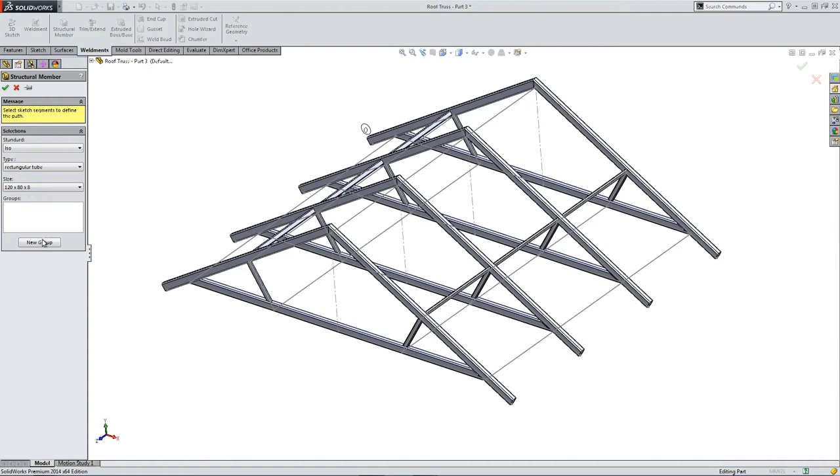Okay, so let's now put the structural support along the top of the trusses. We're going to use the larger rectangular tube in the structural member, and we're going to click the 3 cross support sections.

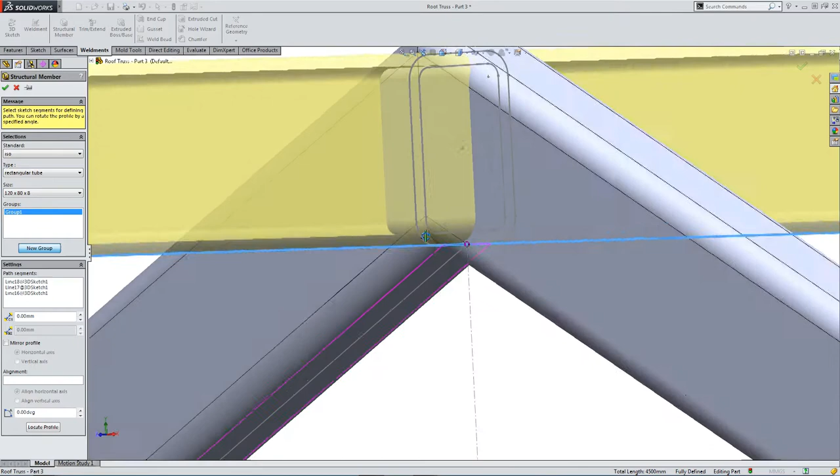Go to locate, profile, click the base, and the profile's still a little bit low, so let's go into the sketch again. It's not precisely where we want it.

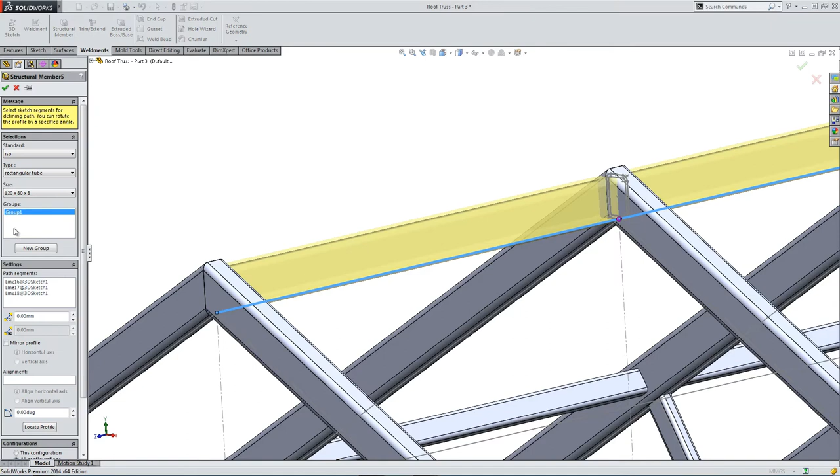So into structural member, just find the profile, yes, find the template sketch, there it is. Let's offset the vertex.

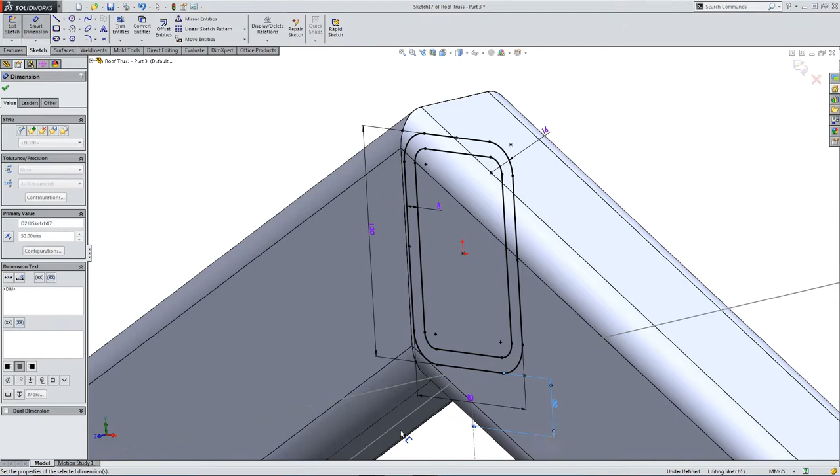Let's make it 30 mil. And it's auto offset, so it's brought it up and away from that base because we didn't want it to fall through.

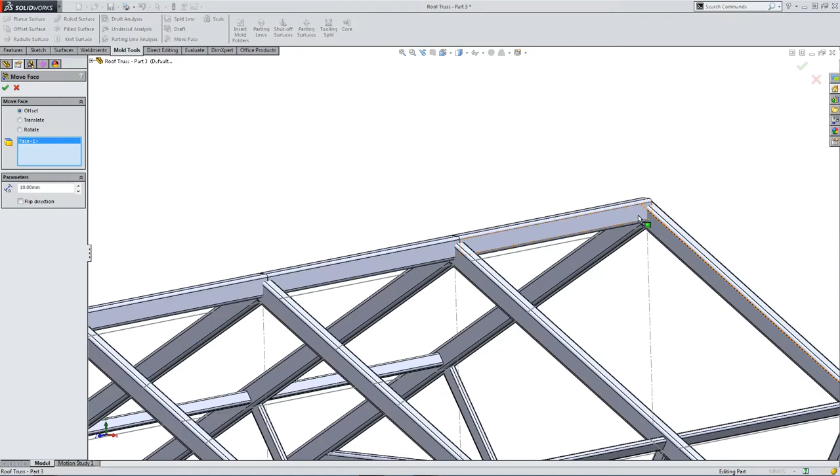So mold tools, move face. I just want to extend this end section, so I'm using the move face option. And I want to select both sides, but you can't do that because it's not gonna put it exactly where I want.

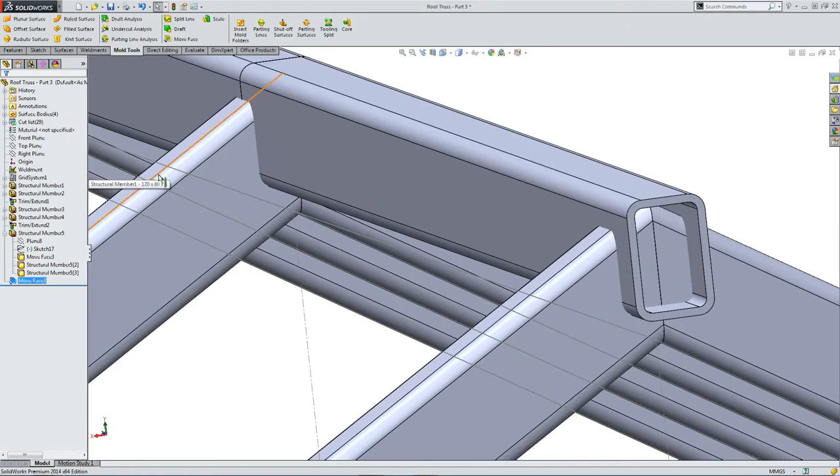No, because it's 2 different sections. So let's come out of that. Let's try that again. Let's do each section individually. So 10 mil. I just wanted to extend past the edge.

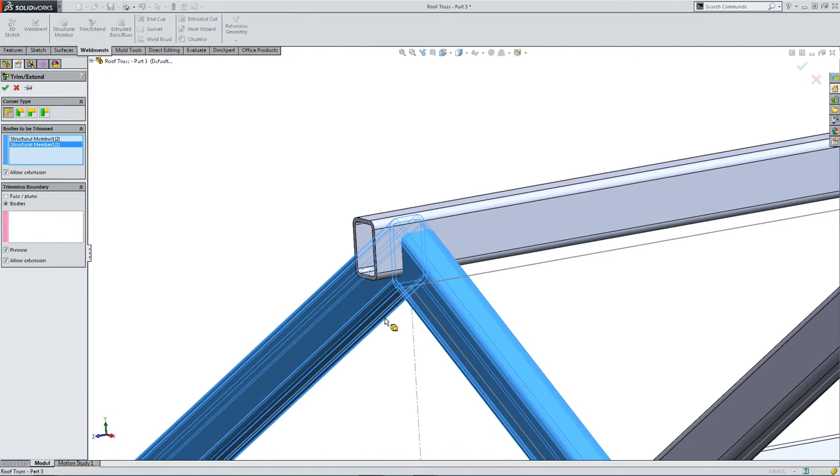And now I'm going to trim back around. So I need to get rid of the excessive tubing or box section. So trim, extend. We've selected the bodies we want to get rid of.

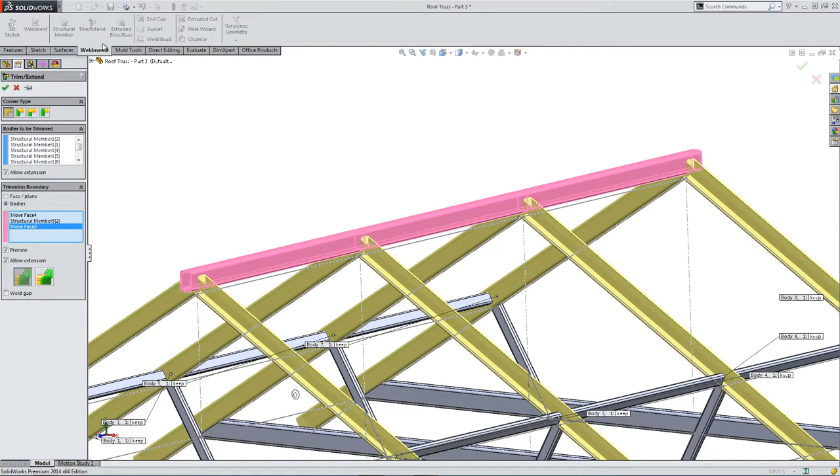Selected the body in pink that we want to use to trim. Need to select the additional trim bodies. Okay, let's accept.

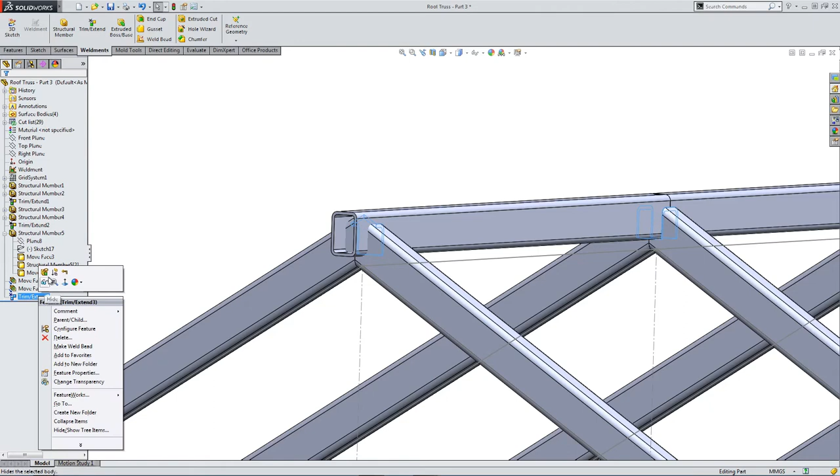Get rid of allow extension just because allowing an extension can actually bring things up and add geometry that you don't want. So it's trimmed everything except the part that we wanted here.

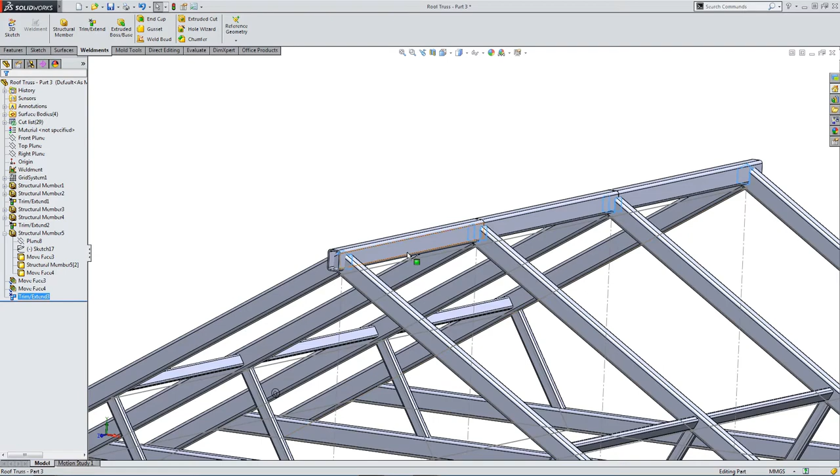So let's get rid of the final extension allowance. So it's trimmed these inner sections slightly differently from the end one.

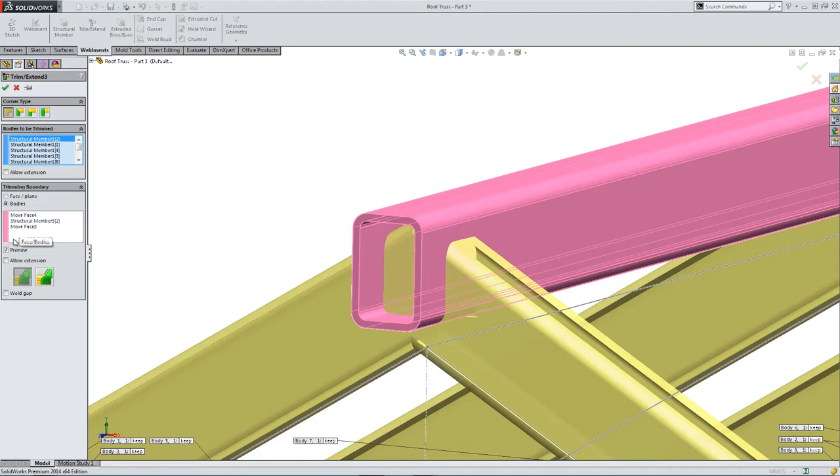Let's go back in, see where it went wrong. And turn off the allow extension feature for the trim bodies. And that looks exactly how we wanted it to look.

So now we've got our top support. And I think we can put a little gusset section underneath just to shore it up properly. So let's make it 500 mil by 500 mil.

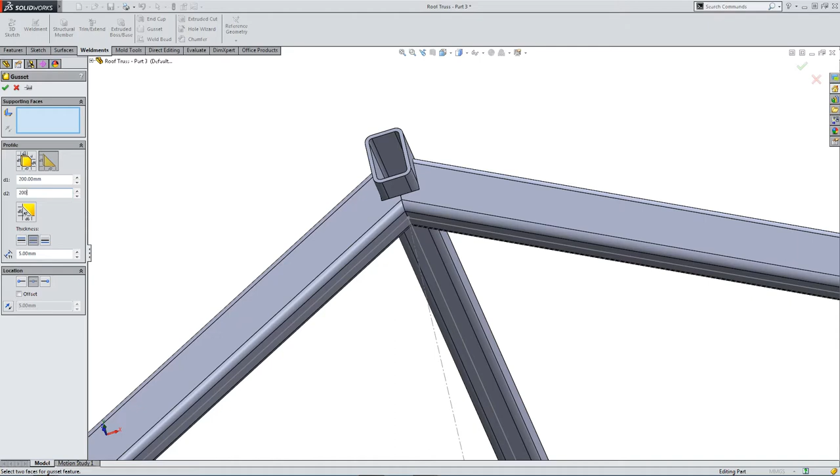Maybe 200. Okay, so our supporting faces, selecting them. We've got it aligned central, but we could move it over either way, like so, and we could offset it to the edge of the sketch if we wanted to, but we're going to have it right in the middle.

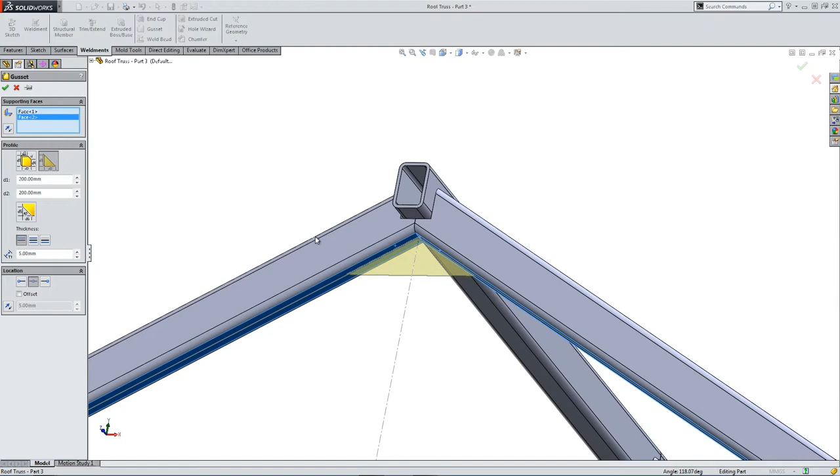So this would be a welded gusset going in just to add a little bit extra support.

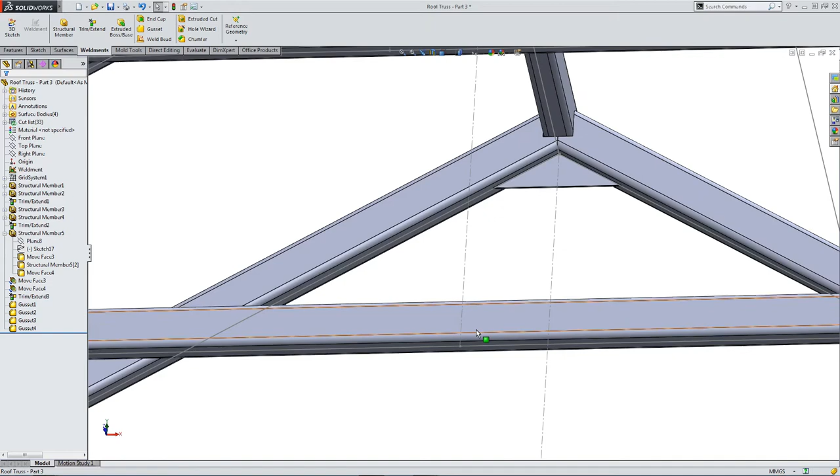Okay, so now we're finished with our gussets, and now we'll come to the reason why so many of these profiles were offset from the lines right at the beginning.

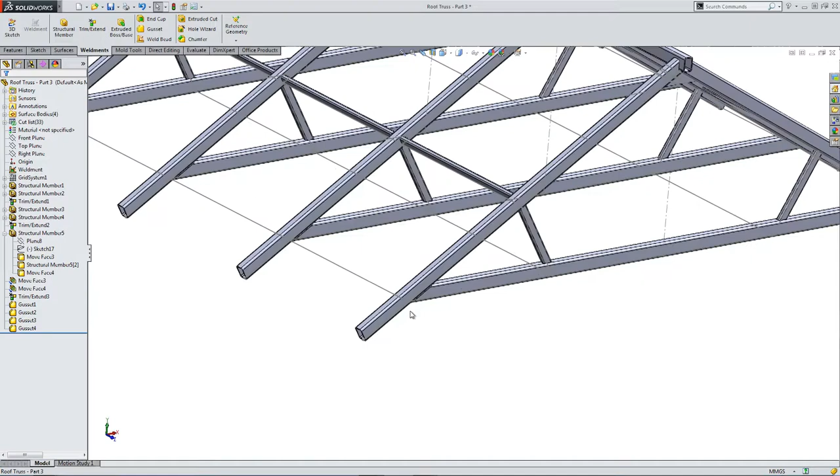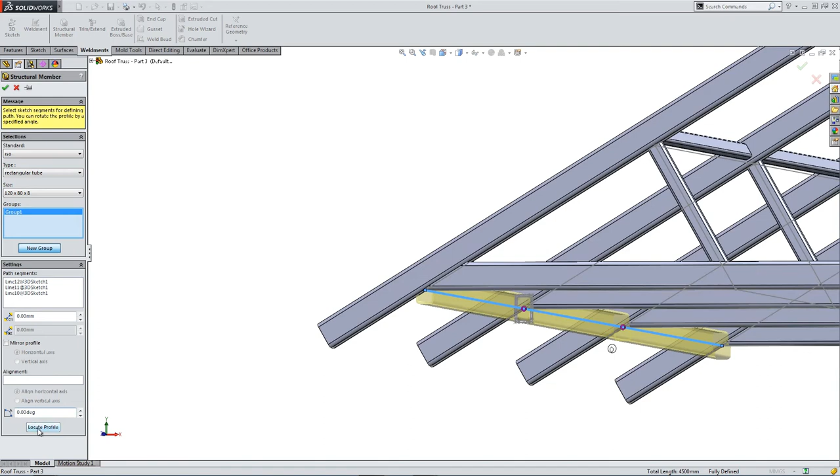So we go down to the bottom, so we're going to have our cross support that this whole truss section is going to sit on. So we draw a section that our truss will be laid upon.

And we snap to the vertex in the corner. So the corner vertex sticks this part right underneath our previously drawn horizontal section.

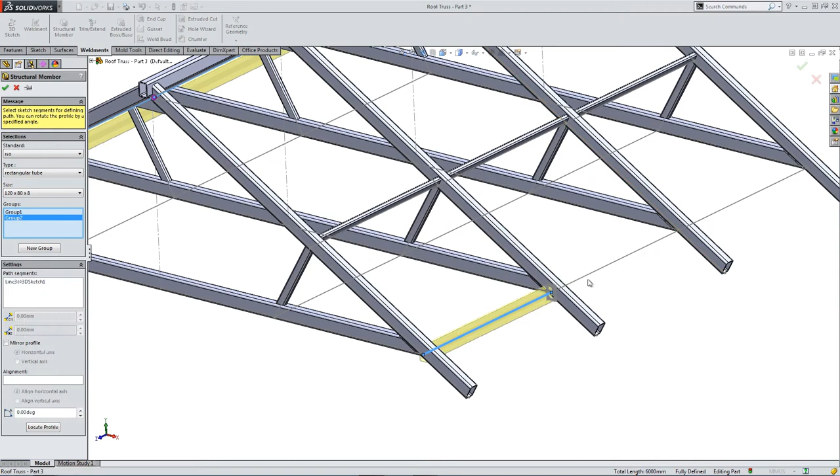So we've used offsetting to our advantage. So click the vertex right in the corner, brings it all down and away. Select that. So you can see.

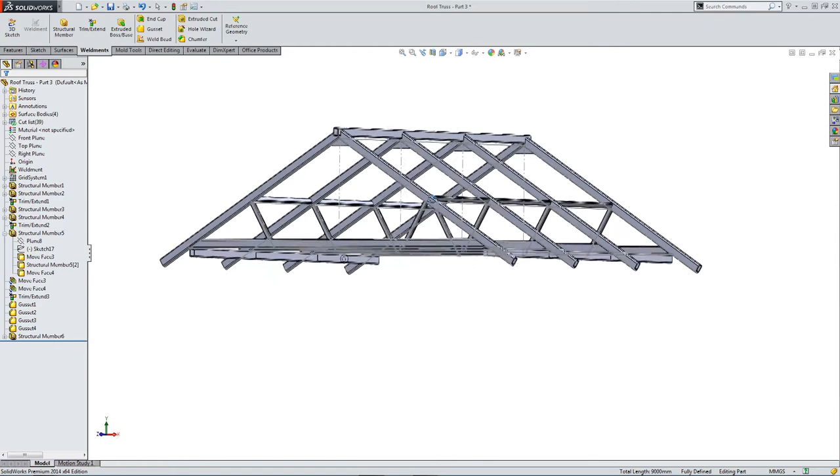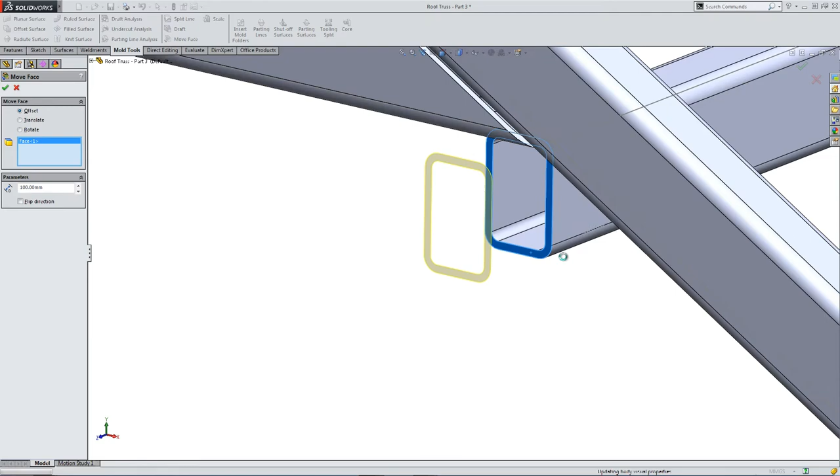Just need to go to mold tools, and let's move those end faces. So this looks a little bit more respectable.

Let's finish up by adding the weld beads. So let's go to weld bead in the weldments panel. First of all, let's turn on weld beads so we can actually see them.

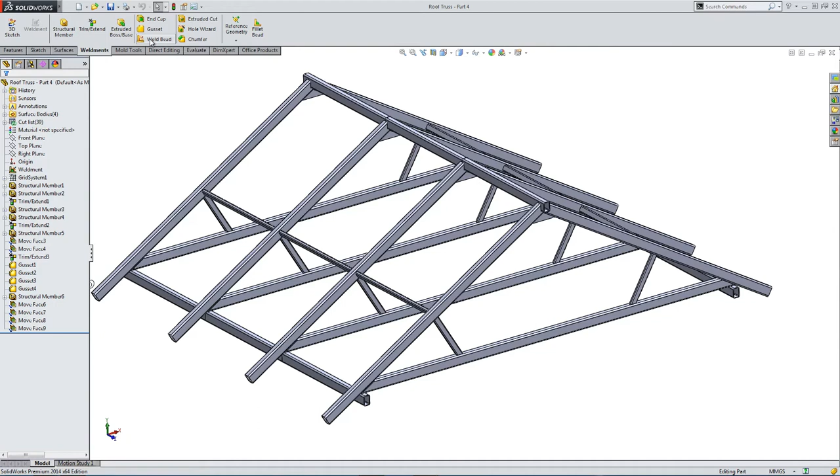So zoom in and go to the sections we want to weld. Click weld section, click our first section, click our second section.

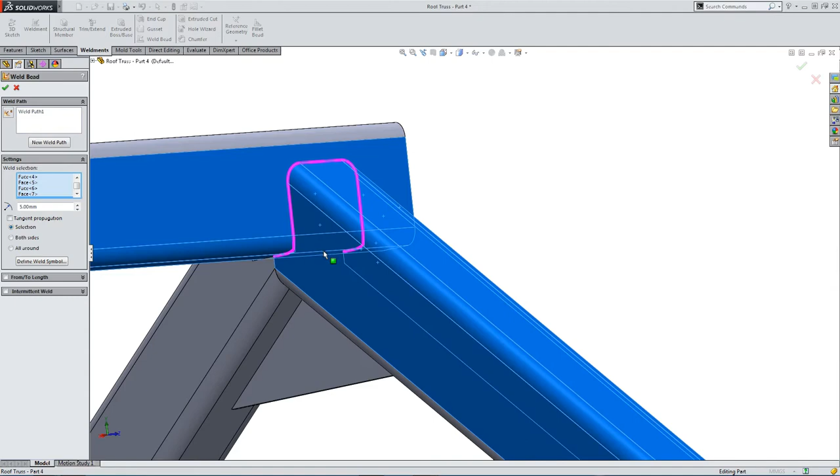We can't weld everything in one go, so we need to kind of build this up. So we've got our first visual weld.

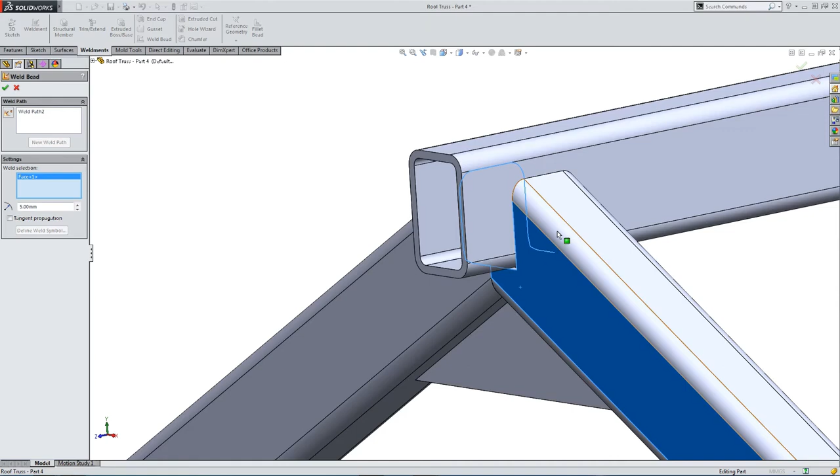And let's add our second. So picking the first set of faces. Picking the second set.

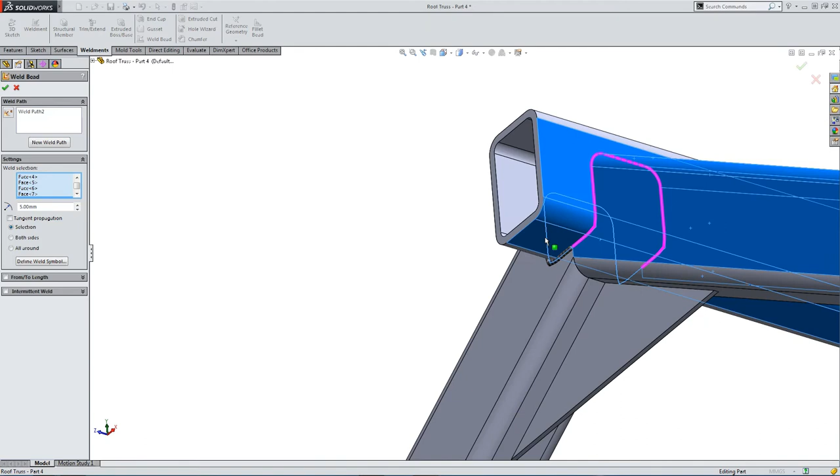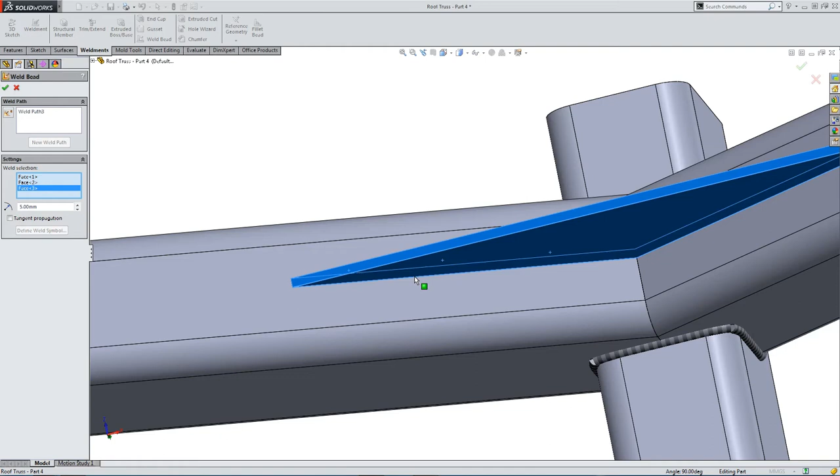Okay, so now we can also weld this gusset in place. So select the faces, and let's select our joining section.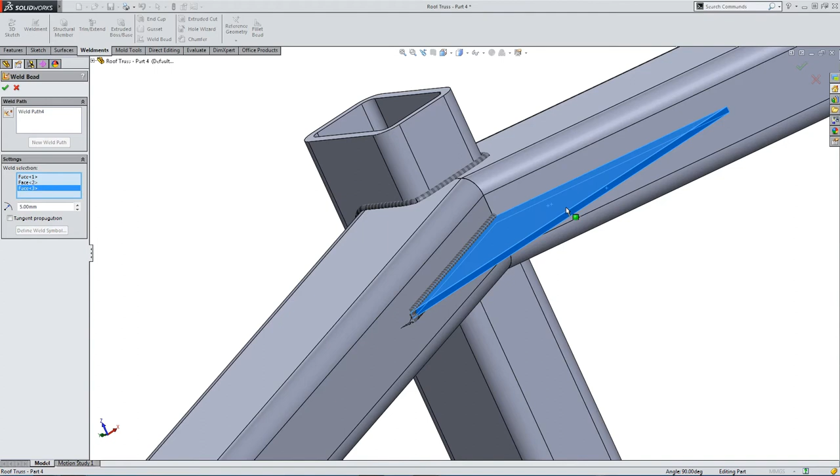And we're going to weld here, and then we need to do the same again to the other section. So first set of faces, and then our joining face, and then we've got our weld bead.

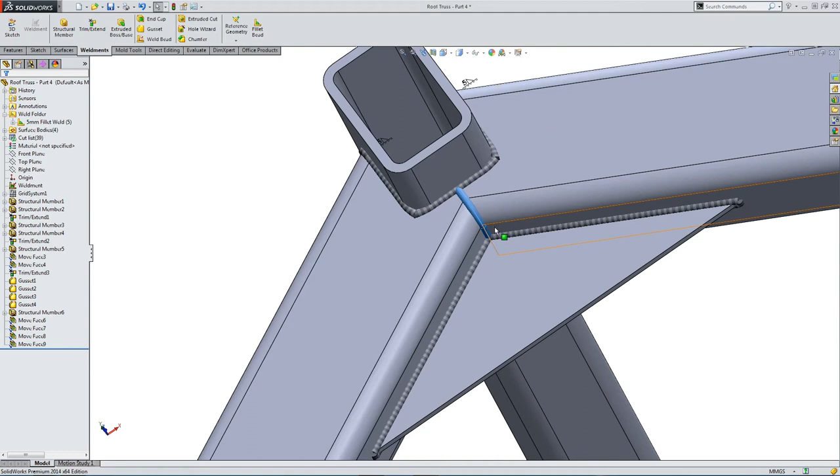So now let's just seal up the gap between the two main beams. So selecting the two sections, and we really want to continue this around.

So we might want to go back in and edit. So let's just have a look, change the angle here so it doesn't go all the way around. So let's go and edit a 5mm weld bead.

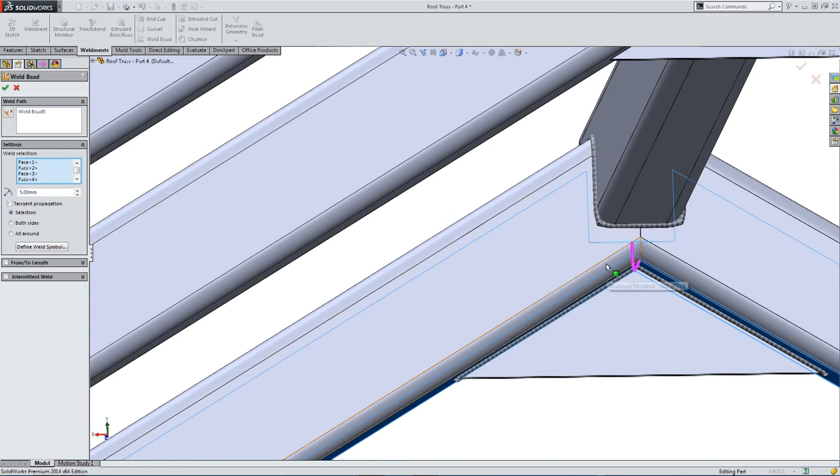Select the additional faces that are required. That looks a bit more like it. And that's it. That's how you use the weld bead feature.

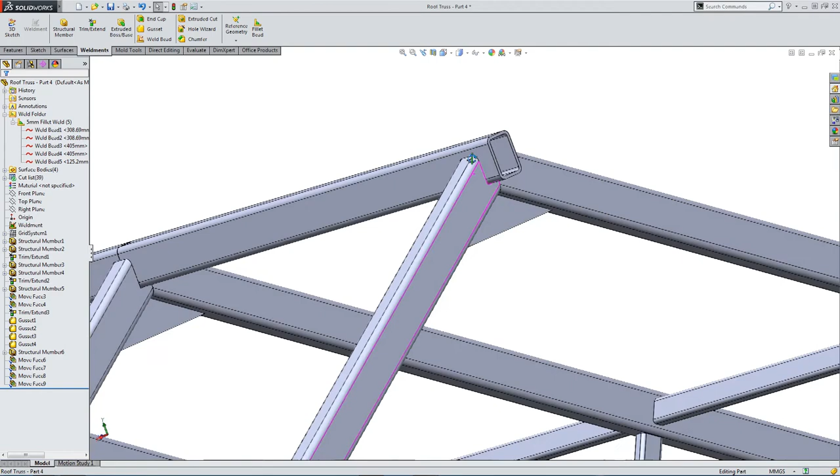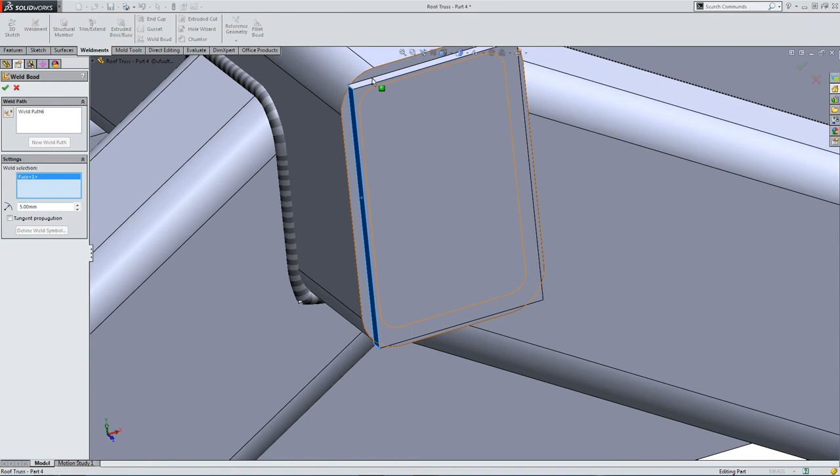So let's just finish off by adding an end cap and then welding that end cap in place. Selecting our first set, then our mating section.